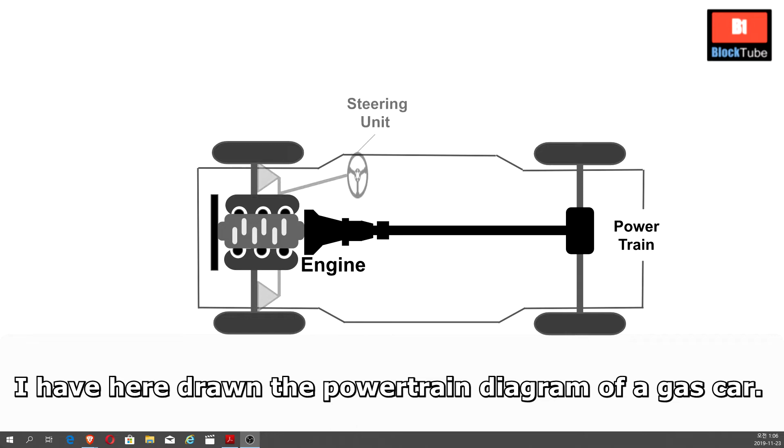Anyway, the reason why Korean electric vehicles are currently more expensive than Korean gas cars is that Korean car makers are making Korean electric cars expensive, and here we have the reason. Let's find it out. I have here drawn the powertrain diagram of a gas car.

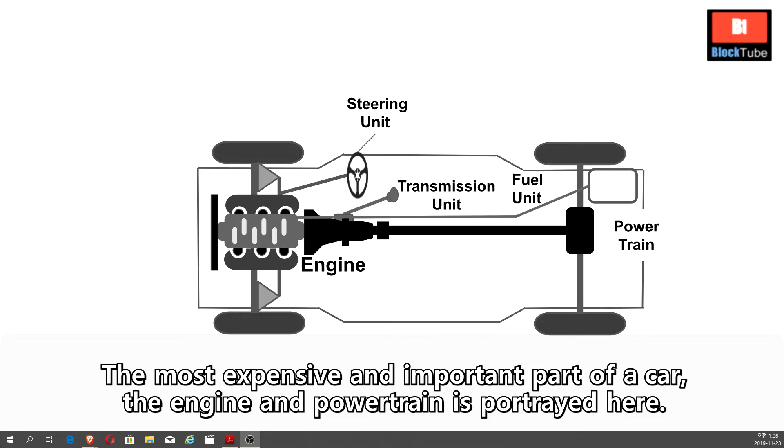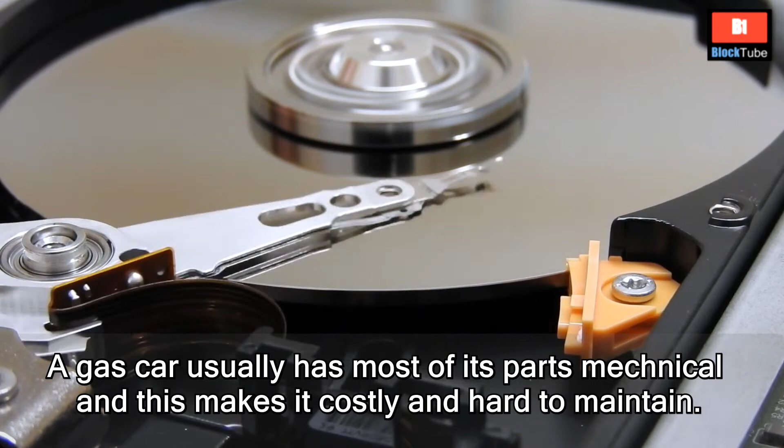The most expensive and important part of a car, the engine and powertrain, is portrayed here, along with the steering, transmission, and fuel unit. A gas car usually has most of its parts mechanical, and this makes it costly and harder to maintain.

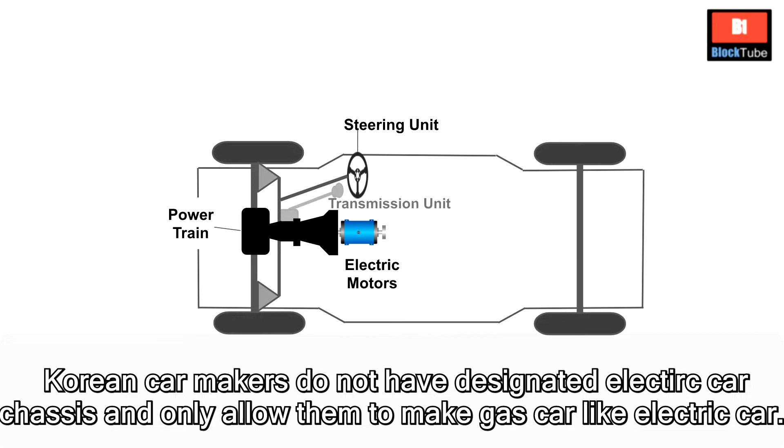Korean car makers do not have a designated electric car chassis, and only allow themselves to make a gas-car-like electric car. They simply put an electric motor in as if it is a gas car engine. They recycle the steering and transmission made for gas cars, except for the batteries and electric motor.

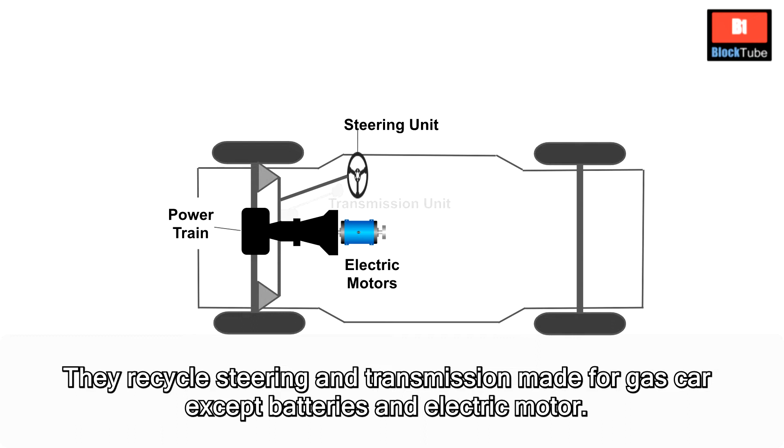Consequently, Korean car makers make electric cars much like gas cars, and the production cost is much higher than a pure electric car.

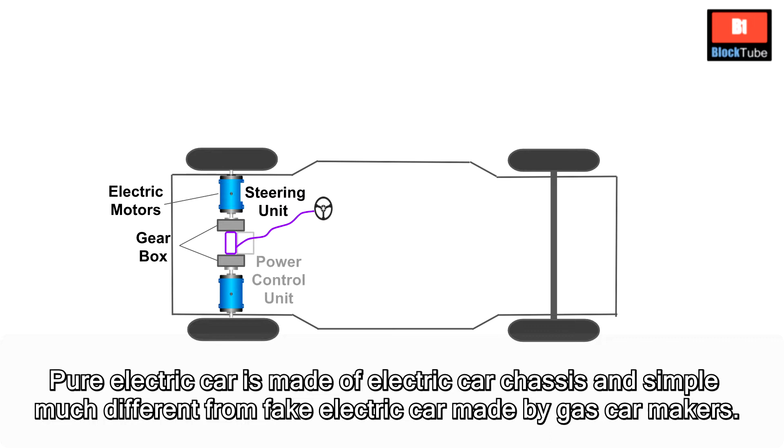A pure electric car is made of an electric car chassis and is simple, much different from the fake electric car made by gas car makers. The powertrain can be easily assembled by attaching an electric motor to the driving axle.

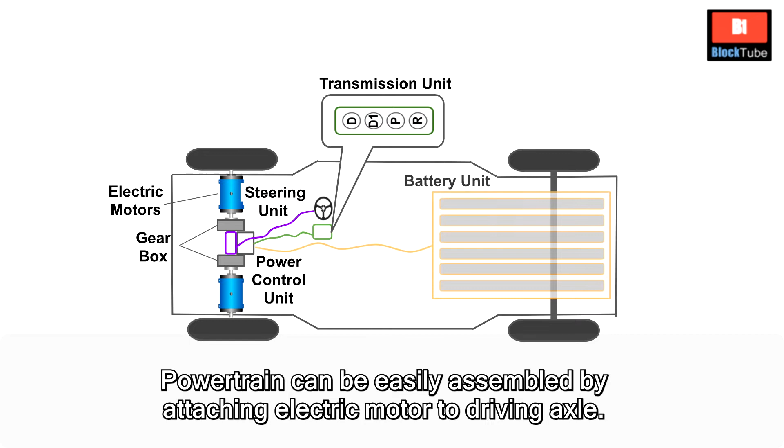Steering and transmission are also made of electric components by eliminating or removing all mechanical parts. Therefore, a designated electric car chassis makes electric cars cheaper.

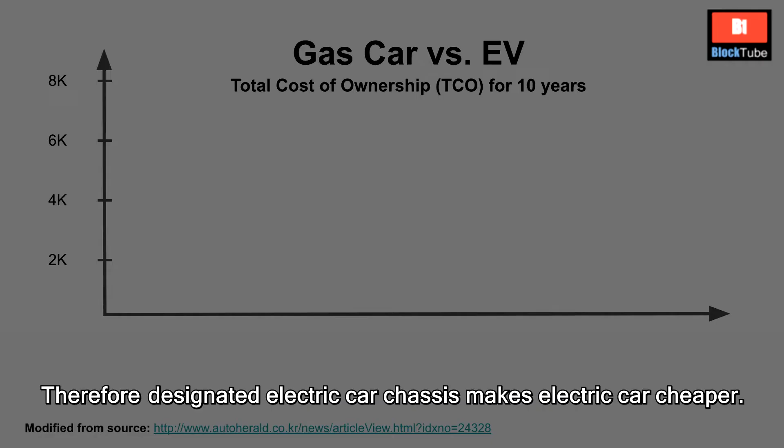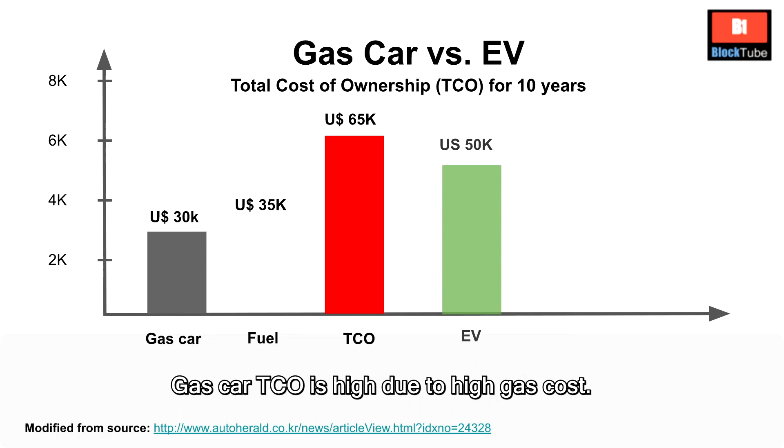Another reason for expensive electric cars is the high TCO of gas cars. TCO, or total cost of ownership, is the car price including fuel and maintenance cost for the car's lifespan. Gas car TCO is high due to high gas cost.

TCO of gas cars is so poor that car makers sell their electric cars at twice the price of gas cars, so that electric car sales can be slowed down. Car makers must continue to sell their gas cars in order to fully recover their gas car production investment.

TCO must be applied when calculating car cost, which usually does not include fuel and maintenance cost.

For a 10-year TCO with fuel and maintenance cost, a gas car will cost more than the cost of a twice-as-expensive electric car.

Another reason why car makers keep selling their electric cars so expensive is that they are deeply tangled with their component suppliers, just like Hyundai and Hyundai Mobis, or GM and Delphi.

Both fossil and hydrogen fuel pay an enormous environmental cost, whereas electricity pays less, and its development for reducing environmental cost improves fast.